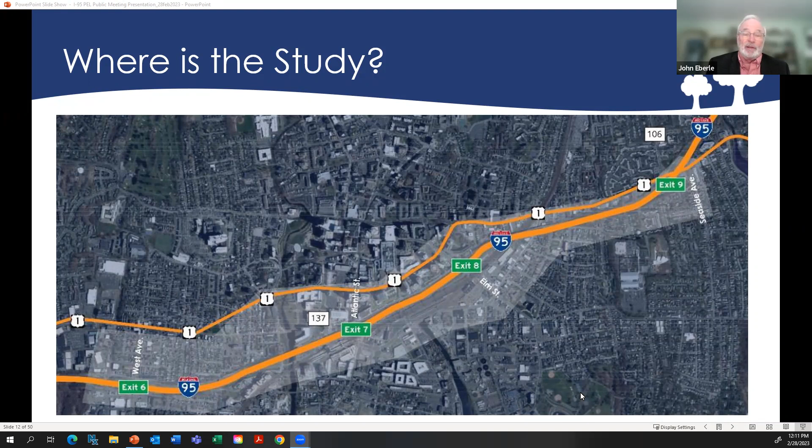Just some quick facts. What everyone already knows about Stamford is that it carries lots of traffic through the area. Some 200,000 vehicles make their way from and to I-95 through the ramps and carry through. So that's a lot of traffic, and a lot of that is on interchanges 7 and 8. Anyone who has traveled in the area knows that.

So 7 and 8 have very high volume ramps, and that's going to be a focus on the study and what we're looking to do out here. As everyone knows, I-95 kind of splits the downtown and southern areas and neighborhoods, but they're interconnected in many ways - motorists, bus, rail, and pedestrians and cyclists are key, and that's going to be part of this study. So we're not just looking at motorized traffic, but bike and pedestrian as well.

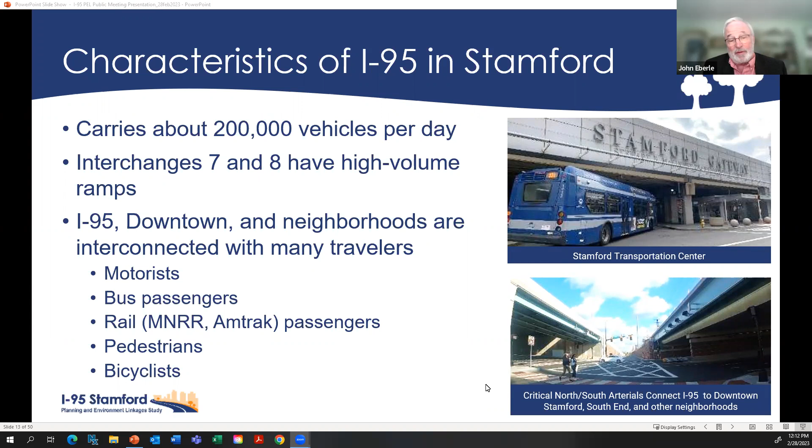So one of the things we're trying to do here is to develop a vision for the I-95 corridor between exit 7 and 9. We're hoping that vision will address the replacement of the I-95 bridge over Metro North Railroad and Myrtle Avenue, but also at the same time improve safety, operations, and mobility in the corridor and on the surrounding local network. And that's going to be important - you're going to be hearing a lot about that, not only today, but as we go forward.

The goals of the project include improved connectivity and livability within the corridor, enhanced social equity and economic vitality. While we're doing that, we're looking to minimize impacts to both the natural and built environments. So that's key.

So what is a PEL study? It's probably very foreign to folks if you haven't done any homework on it. It is a Planning and Environment Linkages study. It is an FHWA recognized process, and what it attempts to do - and does do - is connect transportation planning, which is what we're focused on, but mixes it with environmental and community concerns early in the process so that we can understand what we're doing.

There is more information if you want a detailed look at what the PEL study represents, and there are some links there, and this will be up on the website. Marcy will talk a little bit about that later, but you'll have an opportunity to go in and look at videos and whatnot to get a better picture. But at its core, the PEL study is essentially a linear way of looking at elements.

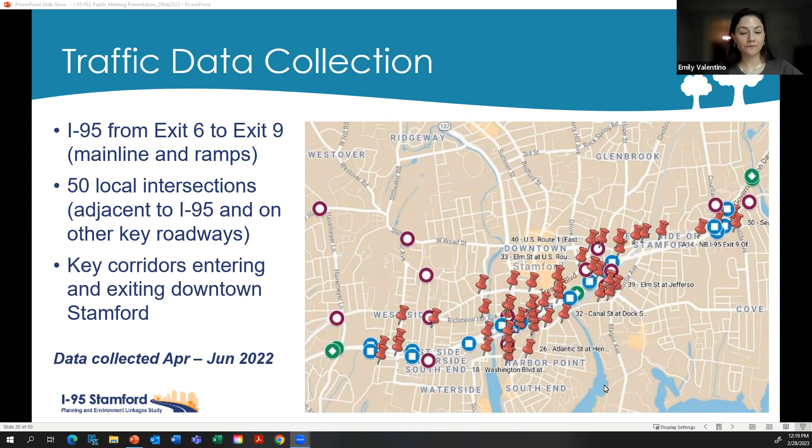So after we studied the existing conditions, we understand what's happening today, we look to the future. How will the area be different? What new developments will be built that could impact traffic? What other roadway projects will be constructed that may impact traffic flow? How will the population and employment change in the region? And how will that result in changes to traffic in our study area?

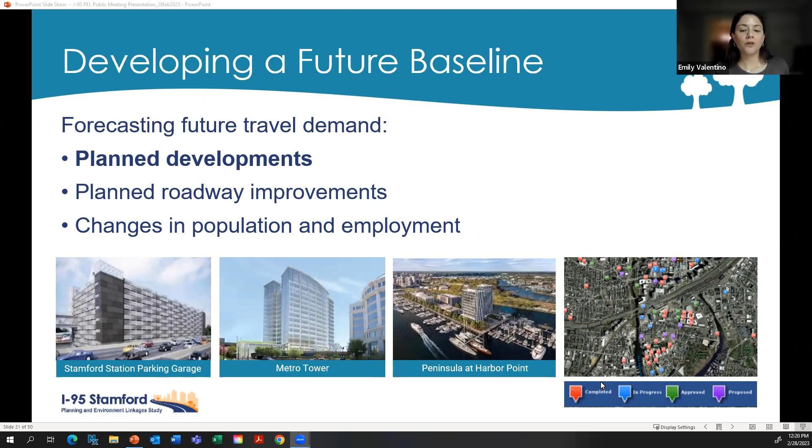We also looked at some planned roadway developments that will impact traffic flow, most notably the Greenwich Avenue corridor improvements, as well as the addition of auxiliary lanes on I-95 between exits 6 and 7. We also looked at other factors that will influence traffic in the study area, such as planned park improvements that may impact pedestrian flow in the area.

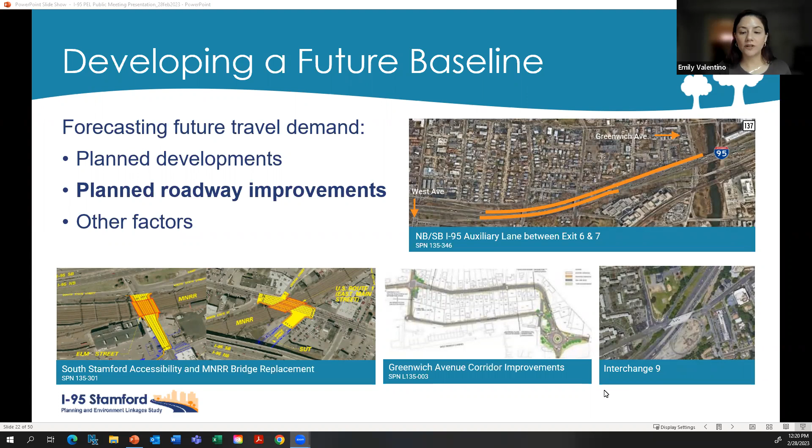You can move to the next slide, please. So these are just some examples of what we took into account when we look to understand what the future will look like in terms of traffic.

So let's go back to existing, and this is kind of an agenda of what I'll talk about next. First, we will look at how long it takes to drive from exit 6 to 9 during normal conditions without traffic and with traffic. We'll also take a look at where trips begin and end their travel. Then we'll look at the conditions of traffic, both on I-95 and on the local streets, and a little bit about the crash history in the area.

Travel time, when there is not congestion, traveling from exit 6 to 9 in both directions for about 3 miles, it takes 4 minutes when there's no traffic. However, when there is traffic in the southbound in the morning, that jumps up to 16 minutes from exits 9 to 6. In the northbound, in the PM rush hour, from exits 6 to 9, that takes about 10 minutes. There is an increase of travel time during congestion.

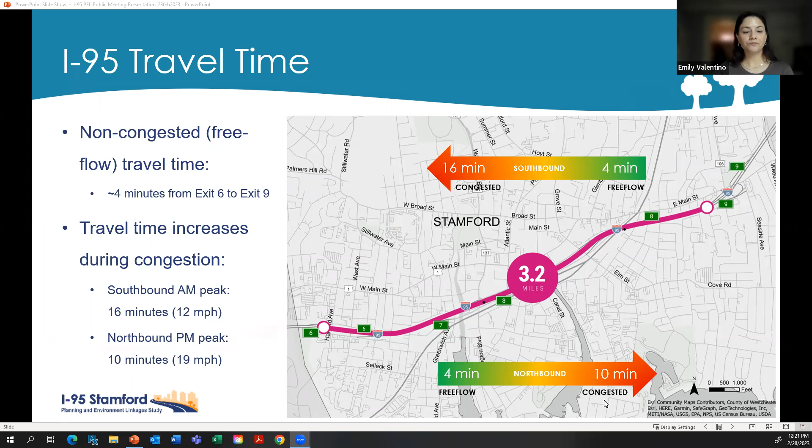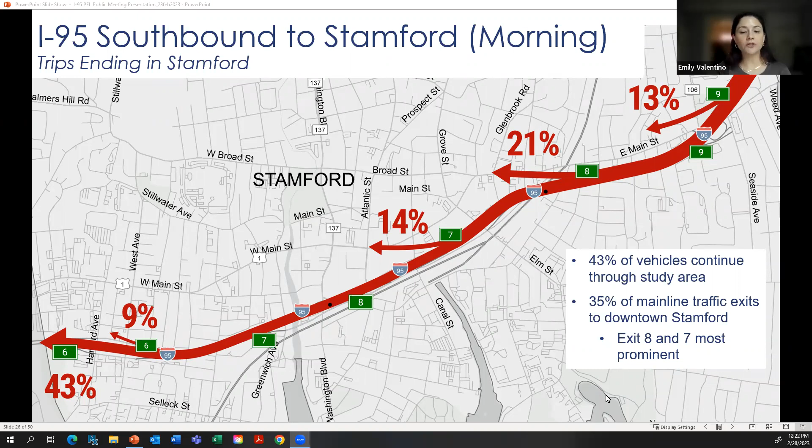We also looked at travel patterns during the morning rush hour. Where do most people exit I-95? In the southbound direction, 14 and 21%, so 35% of the vehicles on I-95, get off at exits 7 or 8 into downtown Stamford. About 43% of those vehicles don't use any of the study area exits, and just travel straight through toward exit 5 and further south.

In the evening rush hour, we looked at northbound trips from the Stamford area entering onto I-95. Results were similar to the morning rush hour in that the majority of vehicles using I-95 come from downtown Stamford. About 29% of vehicles on the I-95 main line come from the Canal or Elm Street on-ramps. Again, about half of the traffic on 95 doesn't use our study area ramps at all. They just drive straight through on the main line.

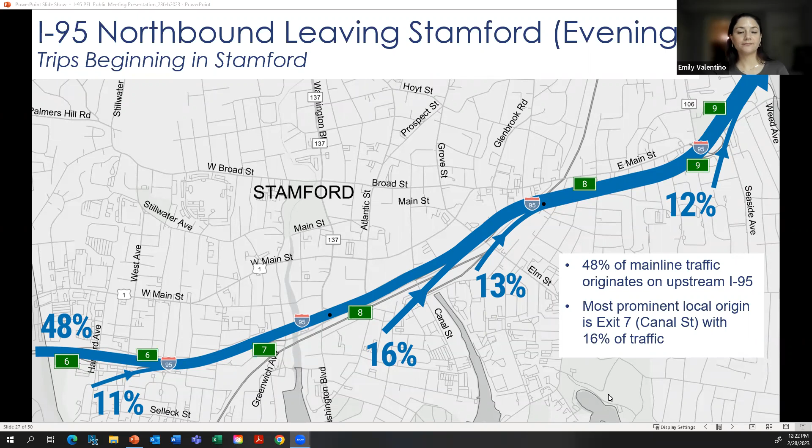Next, we ranked the quality of traffic conditions on I-95 based on performance. In the image below, you'll see a depiction of the grading level of service, or LOS, A through F. Level of service A and B are the best qualities of service. Traffic is free flow, with the 4 minutes of travel time I talked about a few slides ago. There are no delays in LOS A or B. In LOS C or D, still acceptable levels of service - there are some restrictions to travel speed, but delays are minimal and considered acceptable. In level of service E or F, this would be considered failing or deficient travel conditions, where speeds decline significantly and delays are significant.

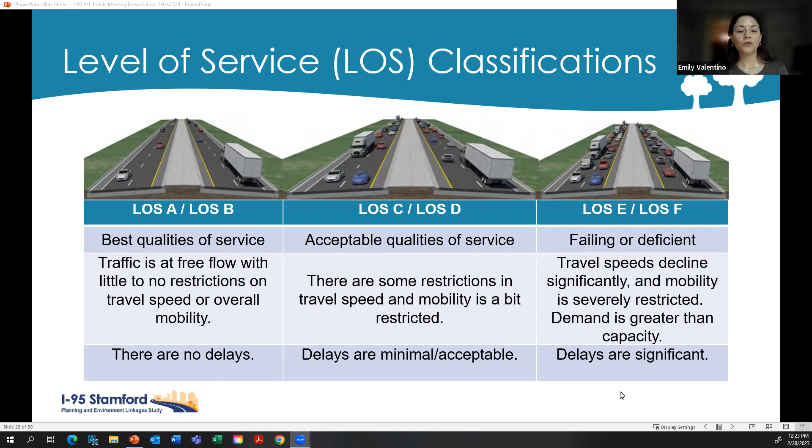So what does that look like on our main line on I-95? We studied level of service for both weekday and weekend peak hours. The analysis showed that weekday conditions are worse than weekend, so today I'll only talk about weekday results. In the morning, in the southbound direction, the majority of I-95 in our study area operates below an acceptable level of service - that was level of service E or F. This is caused by the heavy ramp merges onto the main line, as well as downstream traffic that is limiting the flow to travel southbound.

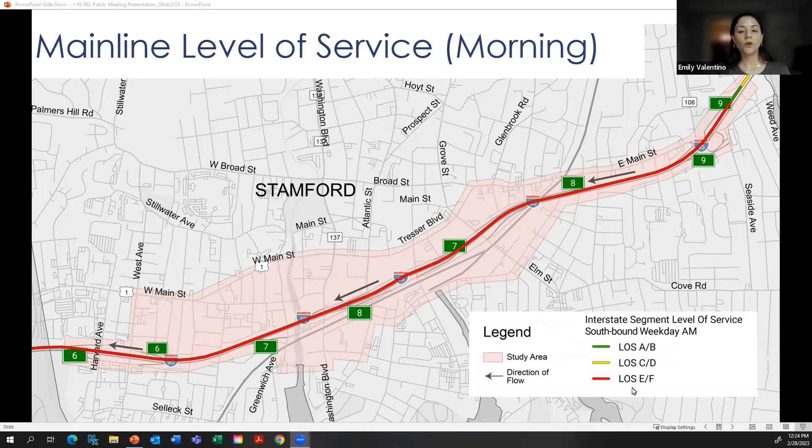When we looked at northbound, the evening rush hour operates slightly better than the morning, with pockets of acceptable and unacceptable levels of service going in the northbound direction in the PM peak.

Then we looked at the PM rush hour in the evening. 2 of the 50 signalized intersections operate below that acceptable range, and that's at South State Street and Canal, and at Elm Street and Tresser. You can see the red dots on this image on the right showing the locations of those 2 intersections.

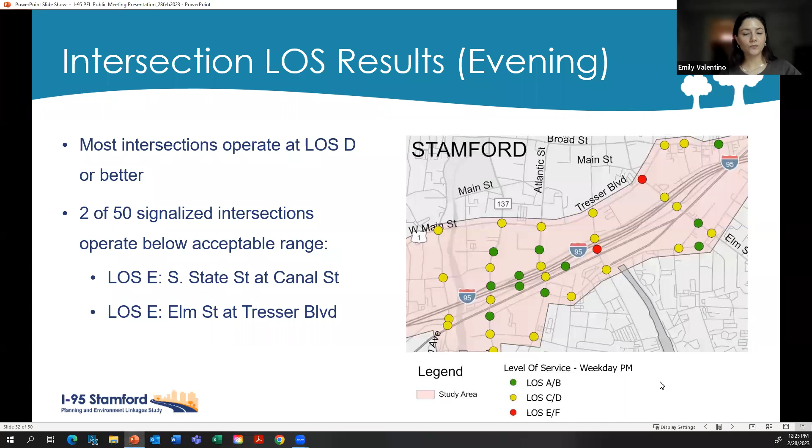Now we will get into the crashes. We studied 5 years worth of crash data from 2016 to 2021. What you see on the map here is a heat map - the more red indicates more crashes. We call that heat map, and crash clusters occur - you'll see the red blurbs. They occur on curves usually and at ramp merges.

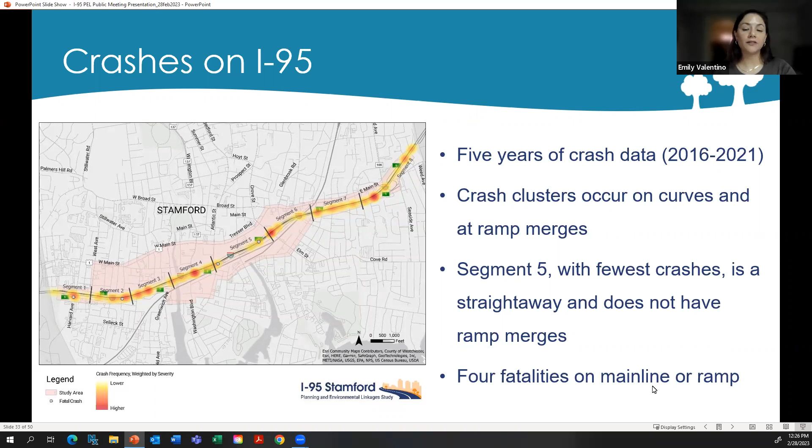You'll notice segment 5 there in the middle doesn't have many crash clusters - it doesn't have any red in it. That could be because it's a straightaway and it doesn't have any ramp merges. Of note as well, there were 4 fatalities on the main line or on one of the I-95 ramps between exits 6 and 9.

We also looked at crashes on the local roadways for the years 2016 to 2021. There were 48 signalized and 2 unsignalized intersections that we studied. Route 1 at Glenbrook Road has the highest crash rate.

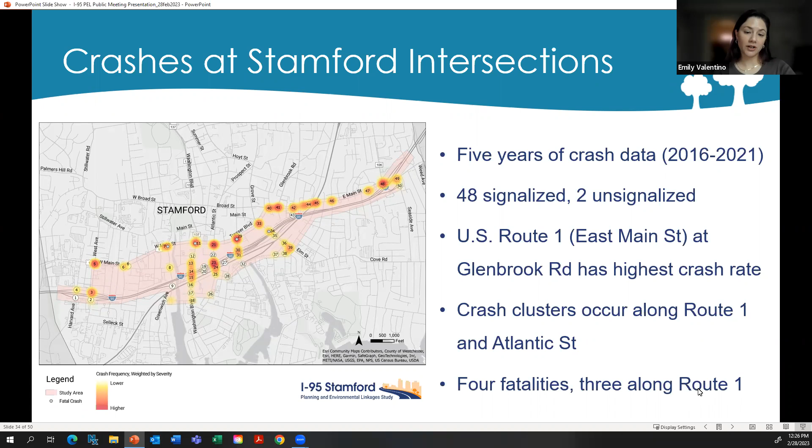I will now hand it over to Mike, who's going to talk about environmental resources. Thank you, Emily.

In addition to the traffic analysis that Emily just described, during the initial phase of the study, we documented a real wide variety of social and natural environmental resources in the study area, including, for example, parks and recreation areas,

wetlands, floodplain, rare species, hazardous materials sites, and everything, all the other resources listed in this slide. Today, we'd like to review our findings of a few of what we thought were the key environmental issues in the project area.

But please, we know that you are the local experts, so let us know if there are other environmental resource issues that you think are important to our study. Next, please.

I'd like to start with pedestrian, bicycle, and transit facilities. In addition to vehicle travel in the study area, we also found really high levels of non-vehicular travel as people moved around the study area as pedestrians, bicyclists, and people using transit, including buses, Metro North Rail, and Amtrak.

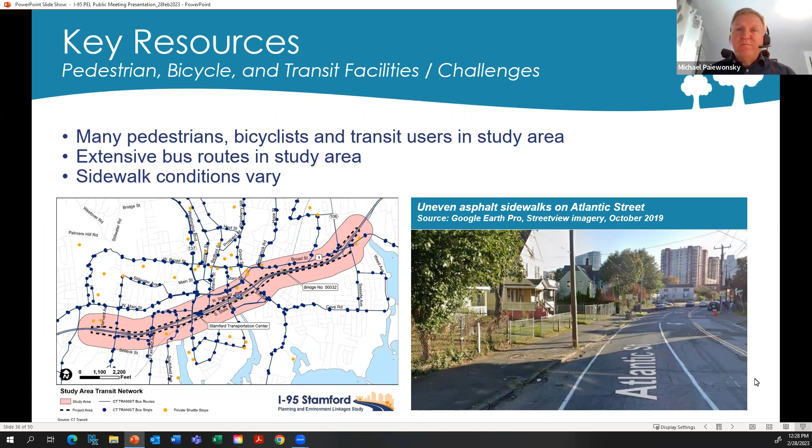And at many intersections, the sidewalks lack access ramps and crosswalks. So overall, it's important to understand all the ways people travel in this area as we continue to consider transportation improvements.

The study area passes through a number of environmental justice neighborhoods, which are areas having higher levels of low income and minority residents.

Overall, the city of Stamford has 36% minority population, but in the study area, it's a little different. 53% of the study area has greater minority population than the city average.

100% has a lower average household income than the city average. And up to 40% of residents live in households with limited English speaking. So this is very important information to understand as we continue our public engagement process during the study.

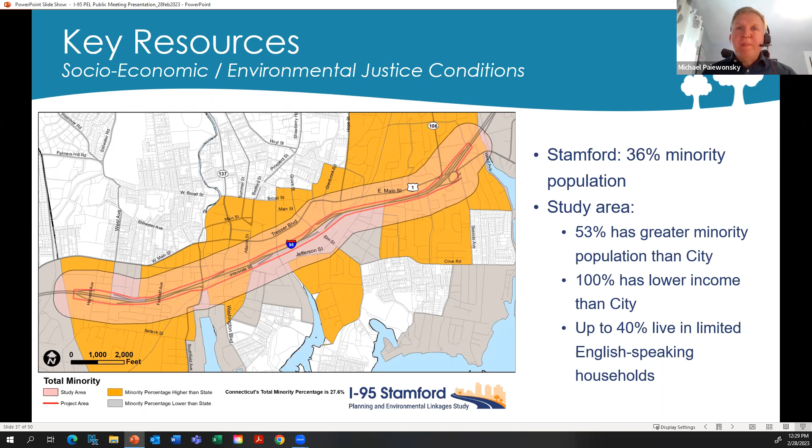Next, please. Historic resources. This study area has a rich inventory of historic buildings and historic districts. A few examples of these really great historic buildings in this area include the old main post office on Atlantic St.

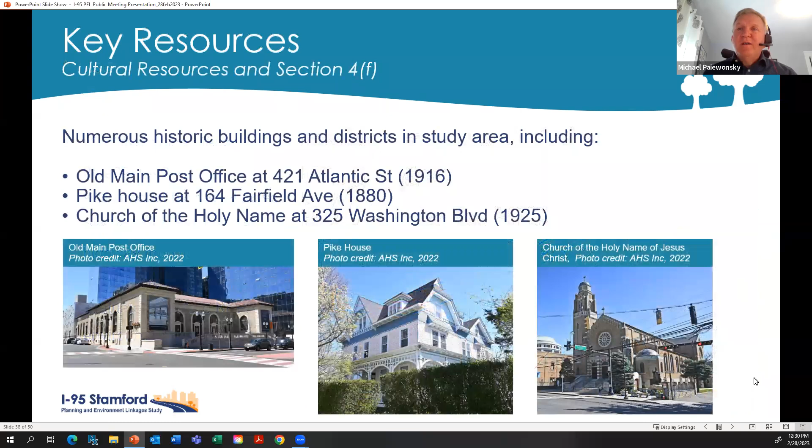So again, it's important to identify and protect these historic resources because they are such an important part of the study area.

And finally, highway noise. Emily described the really high levels of traffic that pass through this area, and with all this traffic comes the noise associated with it. In the initial part of the study, we identified noise affected neighborhoods, and those are those areas indicated in

yellow on this slide. And as we continue with the study, we'll continue to identify noise affected areas that may come about as a result of any modifications to the highway.

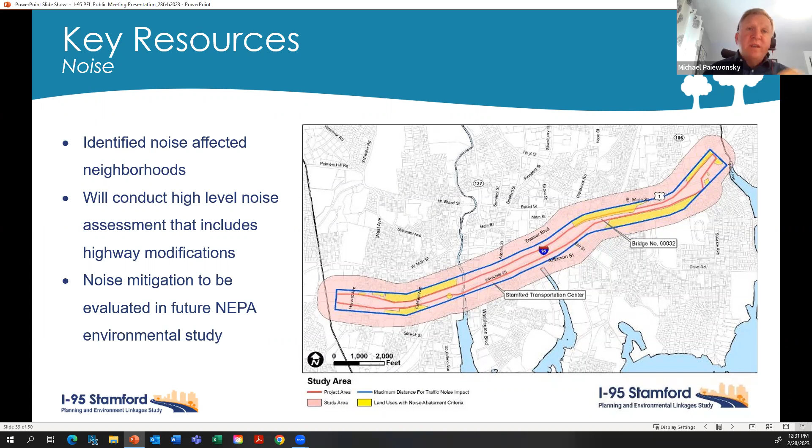Building on that, noise mitigation will be evaluated in a future NEPA study to reduce noise levels for residents who live adjacent to the highway. You can see that's generally noise barrier walls, as can be seen in other areas along the highway, in other areas within the study area.

And next, I will pass it on back to John, who will review the study schedule. Thanks, Mike. So we've looked at where, we've looked at what, and now I just want to touch very quickly on when. We've been working on this study over the past year.

Just about a year ago, we started to ramp up. We've looked at relevant studies in the corridor. We've met with a lot of folks to try to understand the corridor, and we've done our data collection and technical analysis that Emily has shared.

We're about to turn our attention to starting to identify the actual needs of the corridor and the resources. We'll develop some alternative developments and concept designs as we go forward. And we'll be coming back to you folks even before we get too far into that to try to get some feedback.

As we go through there, you'll be seeing a lot of engagement on those. Ultimately, we will look at the various alternates that we come up with, and we'll do an impact assessment.

This will be a fairly high level assessment to screen out alternates that are not reasonable or have too many impacts. It's very important that this study is not identifying the one alternative that will be the preferred alternative. That's for later. What we're trying to do is look at a number of alternatives that are reasonable to be studied further. So that's a very important part of the study.